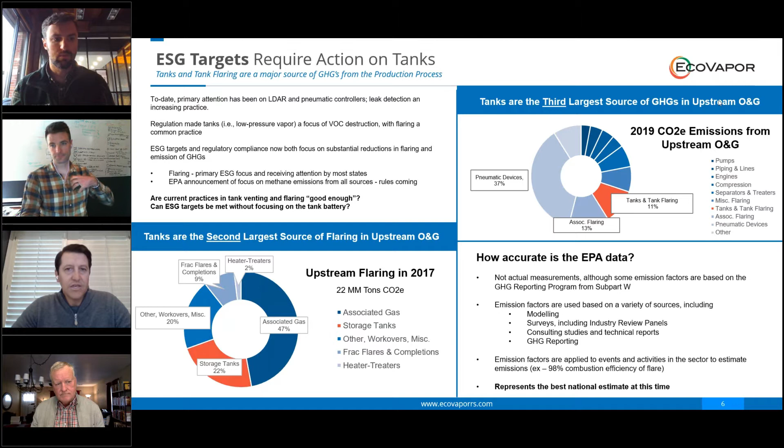So as we transition into some actual data, let's call up a case study from the Permian Basin. In late 2020, an Upton County operator decided to make sure they truly understood their emissions footprint. They embarked on a program using fixed wing drones, truck mounted and ground continuous monitoring devices across all their operations to get a real sense of where their emissions come from. Now, if you rewind to the previous slide and those figures, let's take a look at this chart on the top right.

It's interesting to compare the actual versus the projected emissions and see where they lie. Clearly here, they're seeing that tanks were the majority of their emissions footprint, accounting for 68% of emissions from their sites, compared to 12% based on the factors originally provided. Pneumatics and fugitives on the reporting equated to about 83% of emissions, so based on this study, it's quite a different representation.

It's compelling information, and I think it causes us to take a step back.

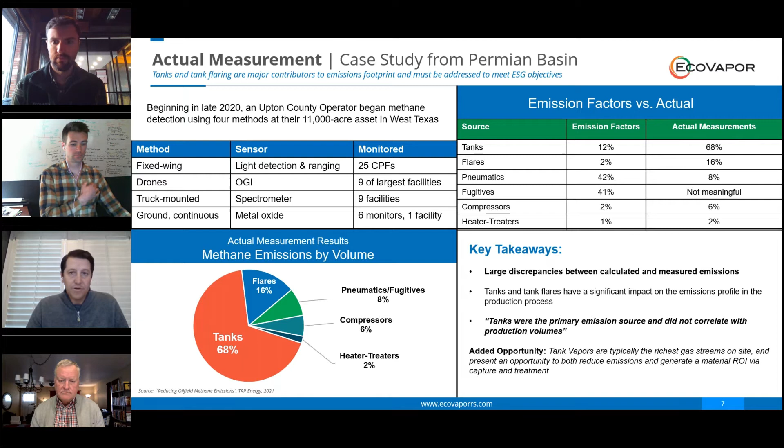A lot of operators like to measure their emissions initiatives by dollars spent per CO2e abated, and that's exactly what we're here to provide. That's exactly the storyline of EcoVapor.

This is exactly where EcoVapor focuses our attention, providing solutions to eliminate natural gas flaring and venting. Our goal is very simple: sell more, waste less. We know how scarce a resource this is, and how hard our industry works to produce it. If we can put more of this natural gas into the pipeline and less into the environment, we're doing a great thing, and that's what we're here to enable.

Really what we're about is maximizing gas capture and sales on a production site. We focus on oil and gas, which we'll talk about a lot today, but we've also recently focused on renewable natural gas solutions. Our core competency around gas purification, enabling pipeline ready gas, equates well to the renewable natural gas industry too. On the oil and gas side, where we'll spend most of our time today, we focus on core areas of true expertise: oxygen removal, H2S removal, enabling pipeline ready gas.

We have a suite of solutions that help all the way from tank battery vapor management solutions, eliminating venting with proper tank pressure controls. We've also recently launched our Emission Scout, which can help monitor and understand flaring volumes and gas contamination in those flared volumes.

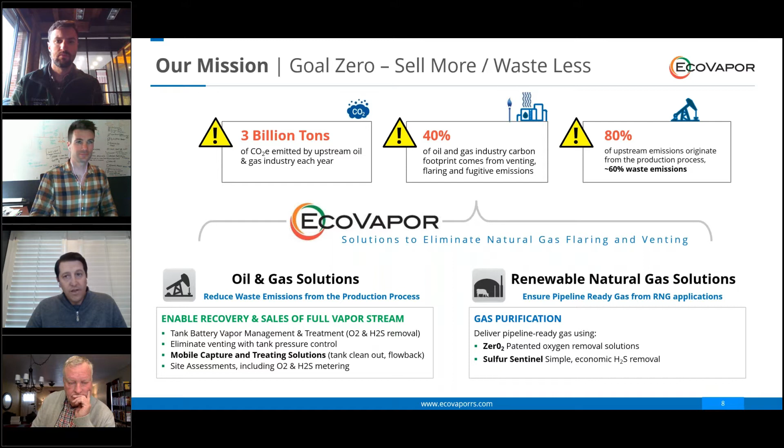Let's take a look at EcoVapor's latest product, the MobileZero, where it fits and what needs it addresses.

I think that we all know that there are many causes associated with regular operations at a well site that necessitate flaring or combustion of natural gas. And some of those examples extend beyond the traditional production processes that EcoVapor has helped operators optimize for over a decade, like tank vapor recovery.

But about a year ago, EcoVapor was approached by a few major oil and gas producers for help with flaring avoidance in temporary applications. There's a long list of them, and some of them include flowback, facility maintenance including equipment cleanouts like tank cleanouts, separator swaps, even facility startups. There's applications at pig receiver stations, gas well liquid unloading operations, jet pump installs, workover rigs, even when gas lift contamination in an upset condition will pop its head up, and then also very low pressure reservoir systems as well.

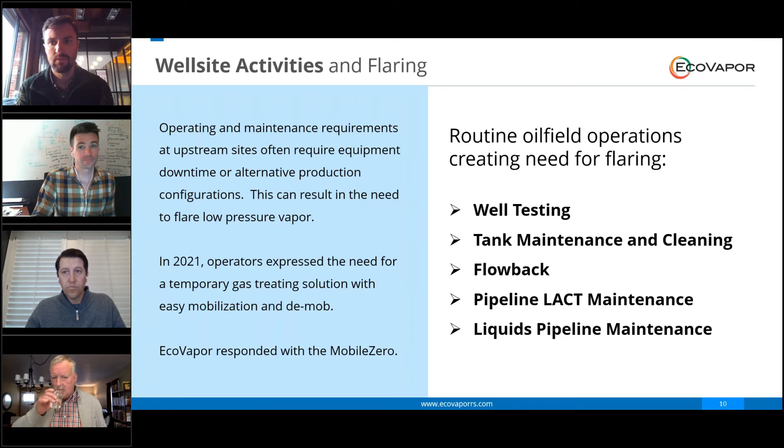And what those requests resulted in was this mobile product that can address these applications that we just discussed, and probably some that we haven't even thought of yet. The purpose of the MobileZero is to address exactly that, and that's to be able to purify gas and vapor to meet sales specifications that are set by the pipeline, so that in a wider range of applications, gas that would normally be destined to go to the flare can be sold.

We've built upon our 12 years of experience, and what you're looking at is the MobileZero with its robust design that ensures that it's able to handle varying flow rates and concentrations of contaminants. We know that this is going to meet a lot of different locations, and I think we all know that every location is different.

But because of that, gas treating is accomplished using a solid H2S scavenger, as well as a catalytic reactor. There's no liquid chemical handling or disposal required. All on-skid components meet Class 1 Division 2 requirements for hazardous locations. And also, the design is customizable to fit the applications and operator requirements that might be specific to your needs.

Regardless of any customization, all MobileZeros are designed for fast mobilization and demob. There's just 4 piping connections and one 480 volt power connection required. We'll talk more about that in a few slides coming up. And everything is automated as well, down to the liquid dumps, all controlled by a PLC.

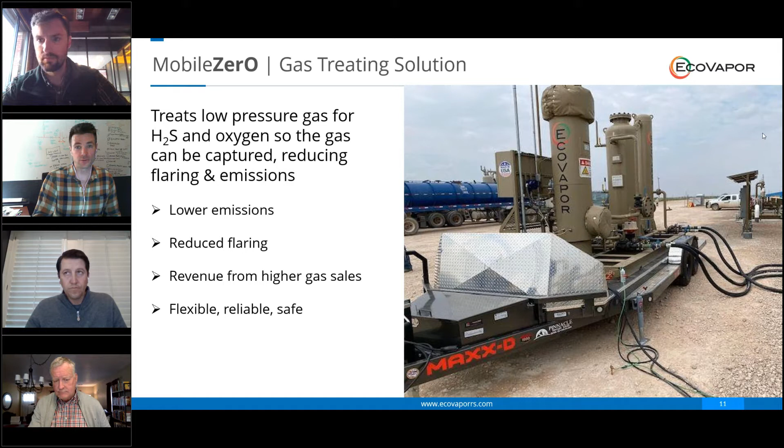The 3 vessels that are included on the MobileZero each play a role in ensuring that your gas meets pipeline sales spec in order to be sold and not flared. First in line is the liquid scrubber. Its job is to remove free liquids and drain from the gas stream.

The 2 processes downstream are highly reliable, not highly sensitive - highly reliable and designed for wet gas service, but they don't like free liquids. So knocking out any liquid slugs is important. That's why that scrubber is there.

The Sulfur Sentinel is the vessel right in the middle, and that's an inherently reliable way that self-adjusts to varying concentrations of sulfur at the inlet. And last but not least in the process, the O2 vessel takes care of any and all oxygen that has made its way into the gas stream. And by removing that, we ensure that you do meet that sales specification that's set by the pipeline.

There are no moving parts on this 2-axle trailer. That ensures reliability and significantly reduces maintenance requirements. Its height of 13 feet means that it can go anywhere in the lower 48 and fit onto your location with no DOT restrictions. It's easy to hook up - we'll talk more about that soon.

And this particular model that we're looking at is designed for a flow rate of 150,000 cubic feet per day with a maximum operating pressure of 260 PSI. But it's easy for us, as we already have done it, we're able to design to meet flow rates of over 1 million cubic feet per day and have operating pressures in excess of 400 PSI.

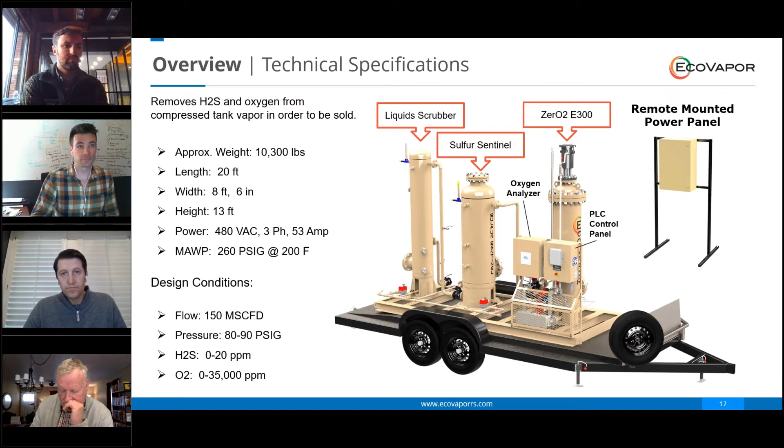Let's take a closer look at some of the select components, what they do, and why they're included in the MobileZero.

First off, we already talked about the liquid scrubber, but just a little bit of a closer look. It's pretty standard, sized properly for the application.

Both of the float switches are electronic, which means there's no pneumatic valves, eliminating the fugitive emissions associated with those. That lower float switch controls the liquid dump valve via the PLC, and the upper is a high level shutdown switch.

What's not visible in this particular view is the sight glass. There's also a diverter internal to the vessel at the inlet nozzle, and also inside is a mist extractor pad.

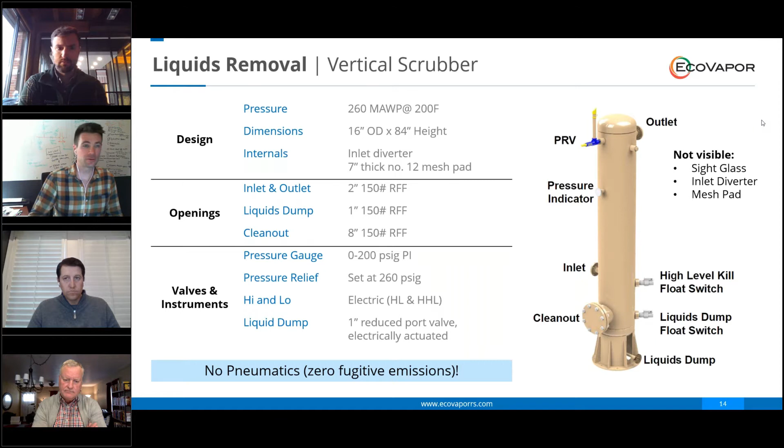This particular model is rated for 260 psi, but again, we can build these to any spec, including ANSI Class 600. Sulfur Sentinel.

What you're looking at on the right-hand side of the slide is an example of a standalone unit. Again, like the scrubber, this was built for a specific application, but it can be designed to meet your flow rate and operating pressure requirements.

And its sole purpose is to remove H2S from the gas stream. That's important for the process immediately downstream, and also to meet sales spec.

It is a simple, low pain in the butt way to sweeten your gas that is flexible to the application. You might be sensing a theme here that there's no moving parts.

In terms of application fit, EcoVapor's rule of thumb is that it fits best into applications with 2,000 parts per million H2S or below, but that's all that is, a rule of thumb. We've seen application fit up to 15,000 ppm before.

One thing to note is that the H2S removal reaction does create water. That is the reason for the liquids dump. We'll talk a little bit more about that later.

But also you might encounter sites that we know for sure are sweet, with no H2S present. On the MobileZero, there is bypass piping included, so you can route the gas around the Sulfur Sentinel.

But important to note, there is no harm in moving gas through that media. If there's no H2S entrained in the stream, it passes through the media unaffected. And also worth noting, standalone units are available.

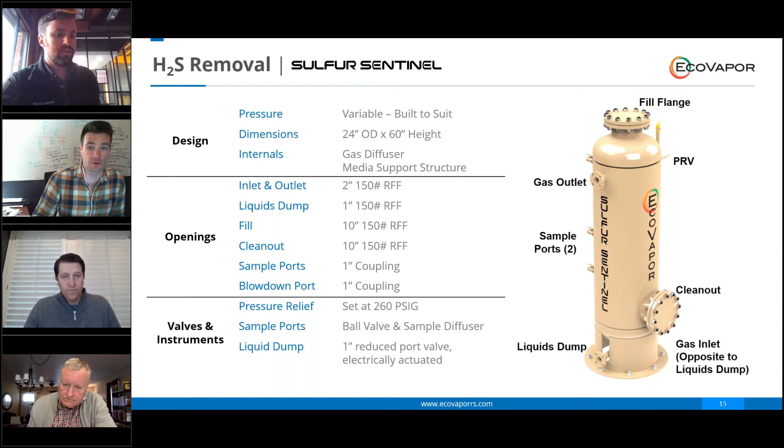Last but not least on the MobileZero's process is the O2. Its sole purpose is to remove any air contamination in the gas stream so that we can sell it, not flare it.

This large catalytic converter, designed for the oil field, is able to handle high flow rates and high pressure.

And also all the onboard automation automatically adapts to operating conditions like varying flow rates and varying levels of contamination.

It also continuously samples the outlet stream to ensure the salability of gas, and adjusts accordingly if it does not, by diverting that gas to the flare line for a temporary period.

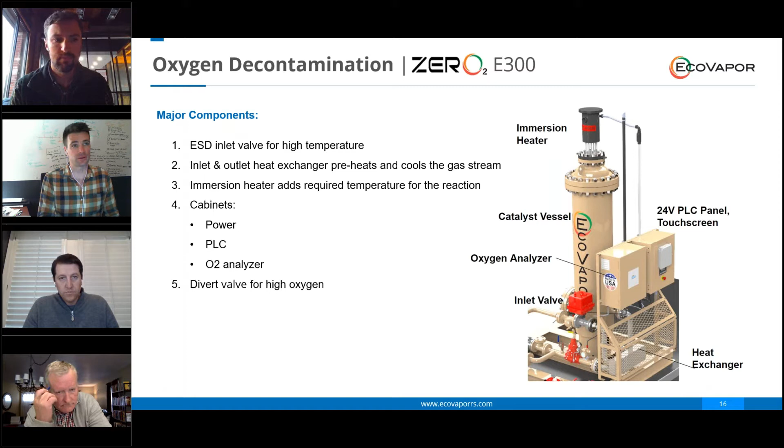Taking a little closer look at the O2's technical specs, for those not familiar with it, here are some of the specs for our E300 skid. That's good for 300 MCF a day.

In terms of pressure, static rating can get up to 410 psi, but the differential pressure is also interesting. This is something we try to tailor to the application to make sure it is well within range. We can get that down to about 2 psi.

Maximum is about 10 psi, and that's really where differential pressure is not an issue. But if you do run up against a constraint, it's easy for us to adapt and reduce that.

The differential pressure does depend on flow rates, operating pressures, and gas composition as well. So we've got a really good sense of what that differential pressure is going to look like before we even deploy.

And we can make any adjustments that your application requires. These are good for purifying a significant amount of oxygen.

Continuously, we can handle up to about 35,000 parts per million, that's 3.5%. But on an instantaneous basis, we can handle up to 50,000 parts per million, which equates to about 25% of the overall stream being air, giving you a 5,000x safety factor to be able to sell gas that you normally wouldn't be.

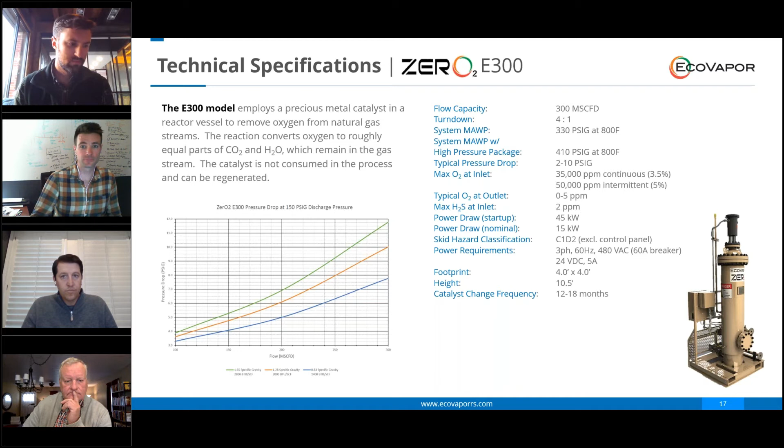I think at this point I'd like to turn it over to EcoVapor's project engineer, Ian Johanchis, to discuss operation of the unit and hookup.

Thank you, Hans. Appreciate that. So today we'll be talking about the operation of the MobileZero. I'd like to highlight three key categories here: we'll go into the mechanical side, the electrical, as well as the automation. And then we'll show a few pictures of example hookups in the field.

So there are 4 piping connections on the MobileZero, starting from the right and working our way to the left. Number 1 is the inlet to the MobileZero, that'll come off the discharge of the compressor and flow straight into the liquid scrubber. Number 2 is the liquids dump, a combined line off of the liquid scrubber as well as the sulfur sentinel.

Number 3 is our divert line. This is connected to the flare, and I'll go into a little more detail about that, but pretty much during startup periods when our reactor is below temperature, we're sending gas through that divert line and making sure it's not being sold until that O2 level comes down. And then number 4 is our sales line. It's very important that number 3 and number 4 do not get confused, because we could be sending clean gas to the flare, and vice versa, gas that has not been deoxygenated to the sales line.

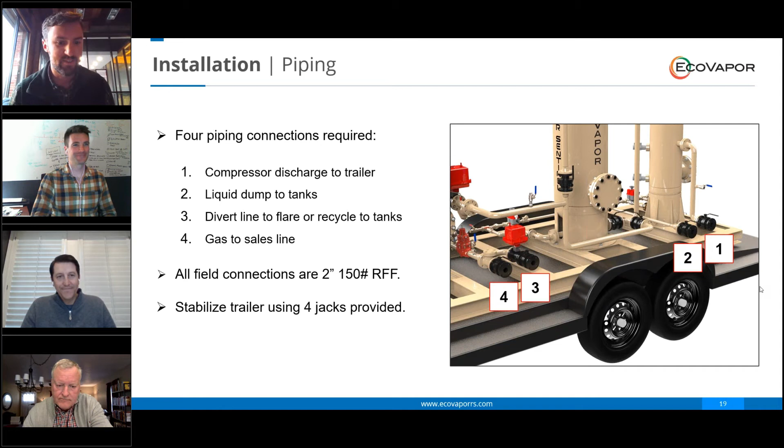So here's an example hookup of how an operator has done it in the field. Again, those mechanical piping connections are 2-inch, 150-pound connections. What has typically been done is they pipe off to the edge of the trailer and then transition to flex hoses with a few unions. This makes for simple hookup.

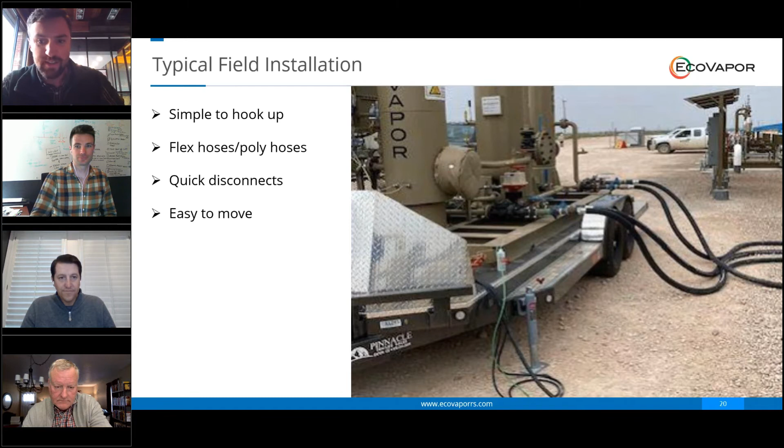Demobilizing is pretty straightforward. So here I'd like to touch on the electrical. Again, the name of the game here is simplicity. There are a few connections we'll highlight. There are 2 panels: one is a 480 volt panel, the second is the 24 volt PLC automation panel.

So with that 480 panel, that's mounted to the trailer itself. However, that will have to be removed and placed outside the hazardous classification area. And that panel does have 3 cables with it. One is the heater power that is pre-wired and stays attached to the panel, running from the 480 volt panel to the heater on the O2 E300 unit.

The second and third cables are for our 24 volt power and our 24 volt signals. Those cables are not interchangeable, so operators cannot hook those up backwards. And then the one thing I do want to stress here is the only thing that the operator will have to do out on site is run facility power to that 480 volt panel. That is it.

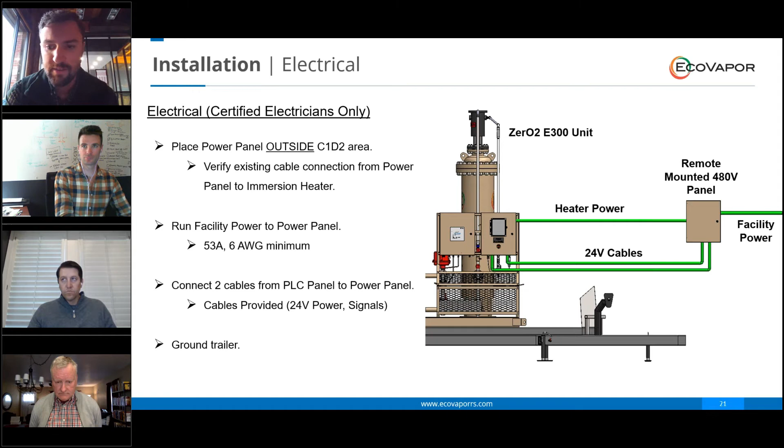I'll just touch on the power draw on that E300 unit. During startup, we're looking at about 53 amps. However, during normal operation, steady state flow, our heater backs down and typically only draws about 30% of that max amperage. That's due to a gas-to-gas heat exchanger on the front end that preheats our inlet gas and cools the outgoing gas.

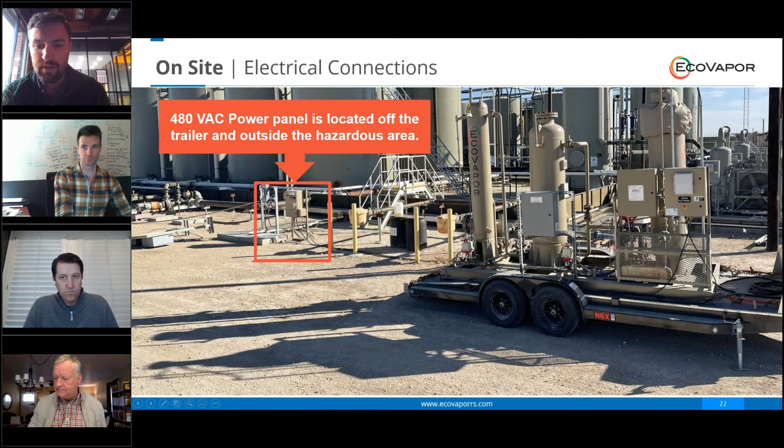Here's a picture of a typical installation out in the field. Again, just want to highlight that the 480 volt panel is off the trailer and placed outside that hazardous location area.

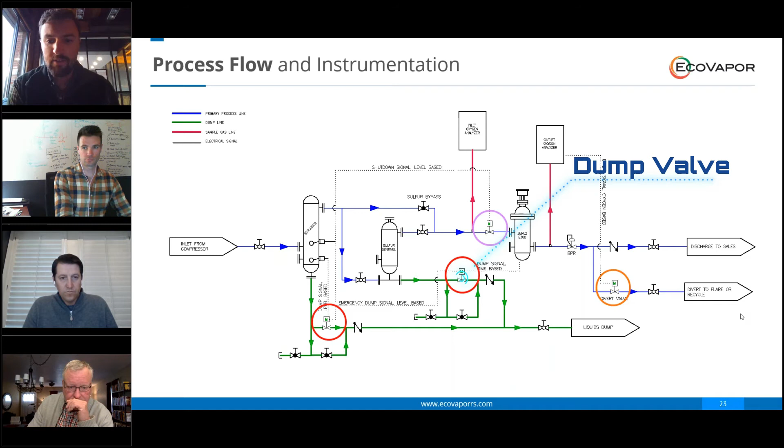Starting from the bottom left, we'll start with the two dump valves. There is one on the scrubber as well as the sulfur sentinel. The one on the scrubber is level-based control. When that low-level switch is engaged, that will operate. And when the high-level switch is engaged, it too will open, as well as close the inlet valve to our E300 ZerO2, to restrict any flow through the unit and evacuate any liquids.

Again, with that inlet valve, that is for emergency equipment protection. It closes when that high level switch is engaged, and also when O2 level concentrations are greater than what we can handle, above 50,000 parts. To put that in perspective, that would mean about a quarter of the gas stream is air. At that point, we'd advise looking upstream to see if there are any valves or hatches open, letting air into the process.

And then finally, to the bottom right, we have our divert valve. This is oxygen based, and it regulates where gas is sent off skid, to the sales line or to the flare. That is normally closed and opens when our O2 levels exceed the max set concentration, typically about 8 ppm, then closes and sends gas to the sales line when our gas is in spec. Typically that's during cold startup periods when our reactor is below normal operating temperatures.

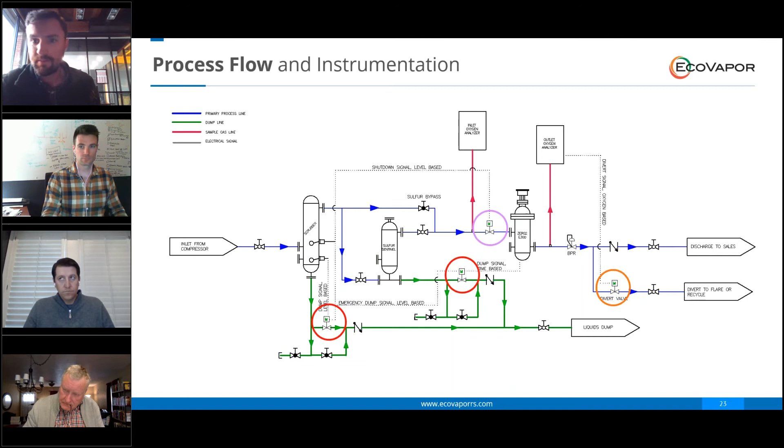All right, I'll hand it back off to Hans to cover a bit of the maintenance. Thanks, Ian.

EcoVapor wants to meet your needs and support you in whatever way is desired. Some people like to maintain as much equipment as they can on their own, in which case we can provide training, no problem. Other people want to focus on putting oil in the tanks, and we can certainly help there too.

EcoVapor is able to provide both preventative as well as call-out services, and particularly with the MobileZero, a lot of variables are introduced when visiting multiple locations, each with their own individual and unique characteristics. What I'm trying to say is that multiple temporary deployments can make maintenance less predictable than long-term standalone installations.

So how do we do that? Well, there are really two things that require maintenance: the sulfur sentinel and ZerO2. The sulfur sentinel adsorbent media is an adsorbent, and it does get used up in the reaction, so we need to monitor the bed health.

That needs to be done while the unit is in service, so that we can understand where H2S breakthrough is occurring and where that mass transfer zone currently exists. It also allows us to predict the occurrence of those media changes. These are designed to be good for about a year, but there can be upset conditions, and that's why staying on top of that is your best bet.

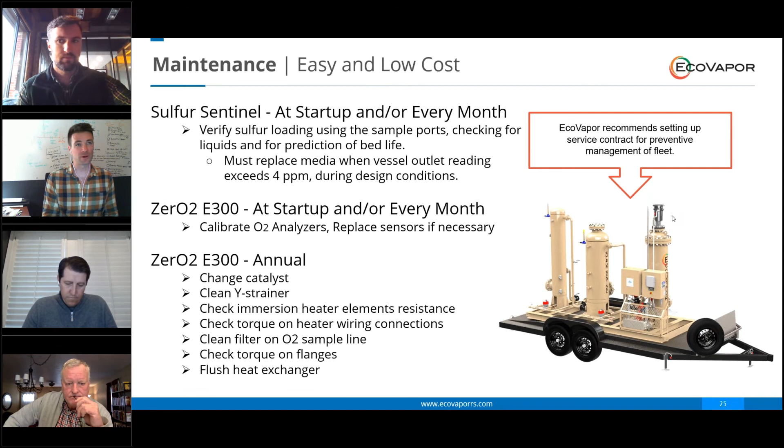There's also some preventative maintenance that we recommend on an annual basis, just making sure everything's free flowing, that the flanges are torqued, and the heat exchanger isn't clogged by anything it might have encountered at one of those sites it was deployed at. But again, this is where EcoVapor can help, so we'd recommend setting up a service contract for preventative maintenance.

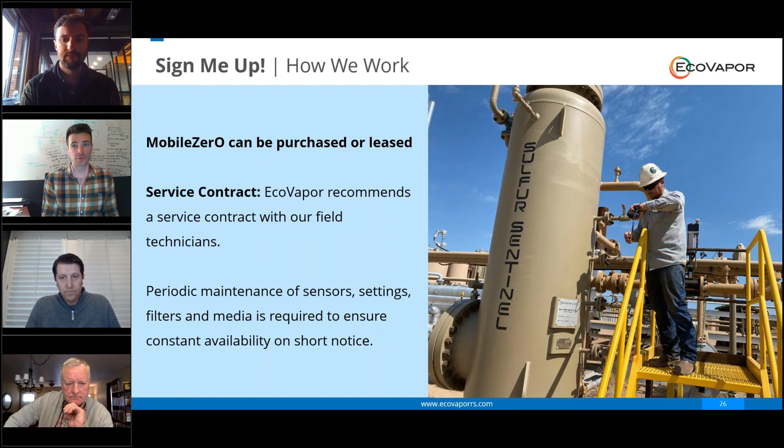So how can you work with EcoVapor? My favorite answer is to say however you'd like to. EcoVapor is flexible to whatever works best with your operating budget, whether that's a leasing model or direct purchase of equipment. Either way, service technicians are ready to support your operations no matter the commercial model. We are here for the long term, and we want to support your success any way we can.

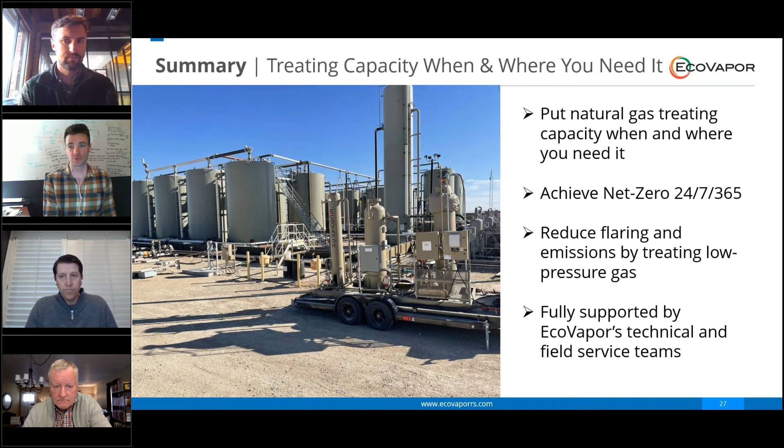So to summarize, the MobileZero gives operators new abilities to rapidly deploy to applications where the needs are temporary for flare mitigation and emissions abatement. This product is built on EcoVapor's 12-year history of enabling the purification of contaminated gas streams so that they can meet the sales specification, so that they can go down the pipe and not in the air. And as always, whether we're in permanent installation territory or mobile temporary applications, EcoVapor's service teams are here to support you where you need and when you need.

Okay guys, good job. We've got a few questions that came in from the audience. One is whether there was a model for an FPSO offshore, a floating production storage vessel, that could be used offshore.

Is it okay if I take that one? Go ahead. Not yet, but if there is a new application, EcoVapor's got a dozen years of experience where we try to meet new applications, identify the needs, and build what it takes to address those. So I guess what I could summarize my answer to be is, challenge accepted. If you'd like to talk to EcoVapor more, please reach out to us. This is the type of thing that gets our engineering team revved up, and we would love to be able to meet your needs. Yeah, thank you, Hans.

And one item I would add there is that never hesitate to reach out on a variety of applications. We'd love to say that we were the geniuses that came up with the MobileZero, but the reality is it was designed to customer need. And with that, we learned more and more that there's a lot of these applications out there that simply can't be addressed by some of our existing products. And so here we are talking about it. So please reach out, provide your ideas, because generally the best innovation is coming from outside. So we welcome and we appreciate the feedback, and we'd love to talk to you more about any of these other applications.